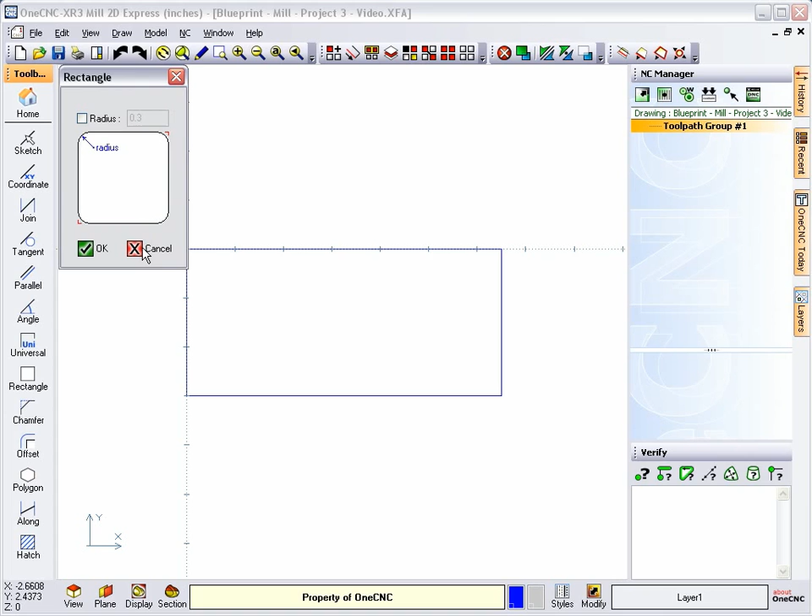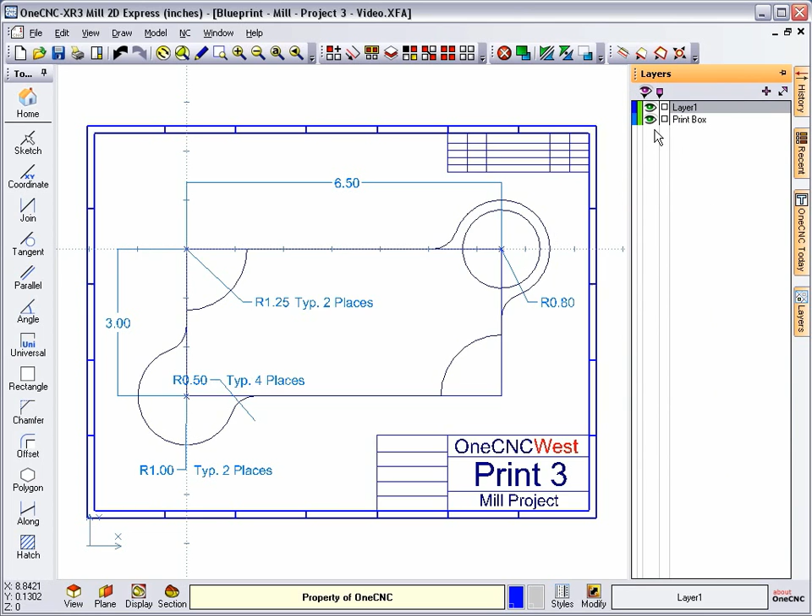The next thing we want to do is create the actual circles at the corners. Why don't we create these 2 circles first? Now if I open up our blueprint, I believe those have a radius of 1 inch. If we look down here we can see radius 1 inch, typical 2 places, so that's these 2 right here. So let's turn our blueprint layer off. We're going to head home, select arc, choose the very first command, and the radius is going to be 1 inch. We'll click OK to that.

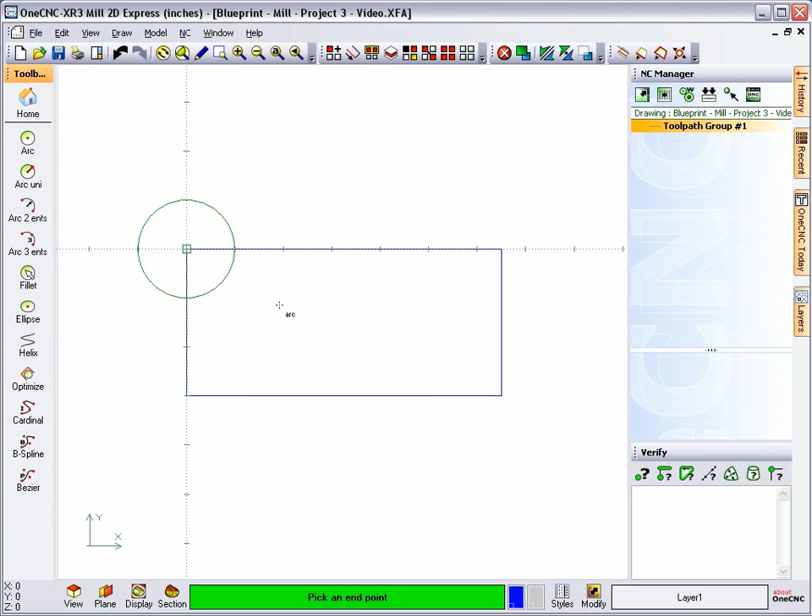And now I want to place these circles at these endpoints. We could use coordinates, but why type in coordinates when we already have geometry that we can use? So let's use endpoint, and all you do is just take your cursor and snap where you want to create that arc. So I'm going to left click, I'm going to left click. Now I'm finished with this command, so I'm going to right click the mouse. You could also hit the escape key on the keyboard if you want.

Now there's another arc in here that has a radius of 0.8, so let's create that. We're going to select the arc tool. Let's change this radius to 0.8. We'll click OK to that. And now we have several options. We could use coordinate, we could use endpoint, or we could use arc center because there's already an arc there. I'm going to use arc center. I'm going to left click. I'm finished, so I'm going to right click.

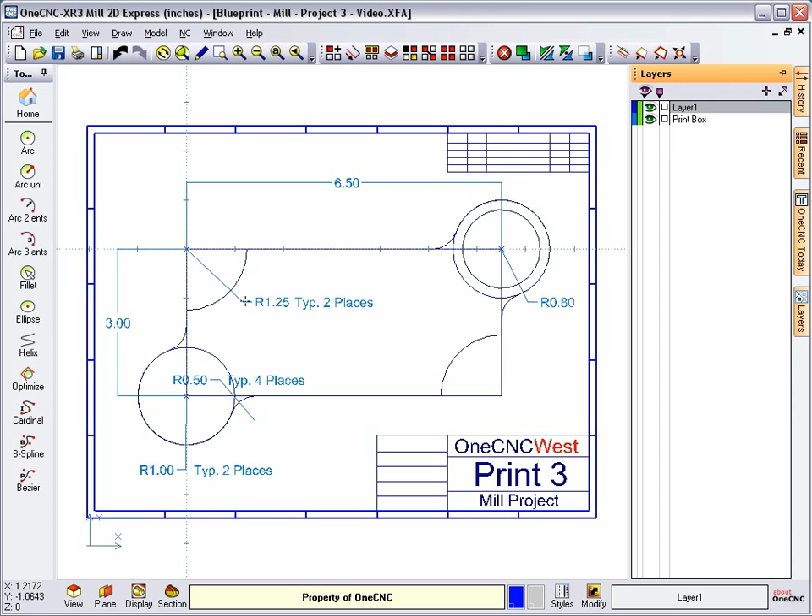Now we need to create these 2 arcs, and I believe they have a radius of 1.25, but let's double check that. And sure enough, those both have radius of 1.25, so we're going to turn our blueprint layer off. Going to head here to arc, and the radius is going to be 1.25. We'll click OK, and I'm going to use endpoint again. So I'm going to left click and left click. Now I'm finished with the command, so I'm going to right click. So you can see now we very quickly have created our basic shapes. We have our rectangle in place, and we have all of our circles created as well.

Alright, let's start trimming our part now. But before we do this, I want to remind you that all circles are created counterclockwise, and all circles start and terminate at 3 o'clock. If you remember this, it will certainly assist you when you start trimming. Alright, let's begin. I'm going to click home and then trim. Let's go with trim 2.

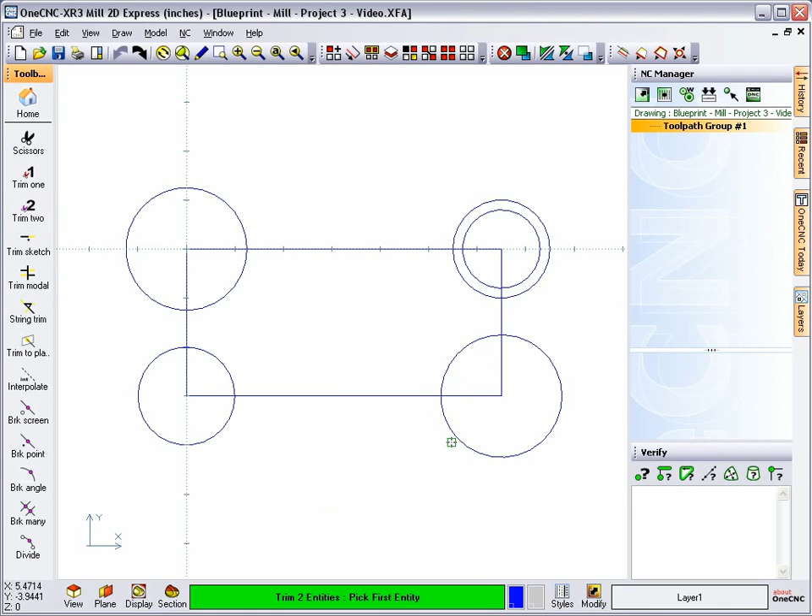And we're going to work with this circle in the lower right hand corner. I want to keep this portion of this line and this portion of the arc. Now notice how the arc terminates at 3 o'clock. That's because the arc started at 3 o'clock and went counterclockwise until it stopped. And we told OneCNC to keep this portion of the arc.

So let's continue trimming. We're going to left click here and then left click right there. That looks great. Now let's work here in the upper left hand corner. I want to keep this portion of the line and this portion of the arc. Now when I do that, you might say, wait a second, it looks like OneCNC trimmed both at the same time. In actuality, that's not the case. OneCNC trimmed down here, but the remainder of the arc stops at 3 o'clock, and that's why we have this.

So let's continue trimming. I'm going to left click here and left click right there. And that looks great. Let's continue working with these 2 circles now. Alright, so what we're going to do is tell OneCNC we want to keep this portion of the horizontal line. Now what's interesting here is if I digitize this circle over here on the left, it's going to take this line and extend it all the way to the left, and I don't want that. And this is really something that you want to keep in mind when you're trimming. Let me give you an example.

I'm going to digitize a circle over here, and sure enough, OneCNC does exactly what we told it to do. All right. Now I don't want that, so to get rid of this, I'm just going to right click to exit out of the command and hit the undo button. I'm going to go back into trim. This time I'm going to say, okay, I want to digitize here, and I'm going to digitize the right side of the circle. So now I've got to trim from here to here.

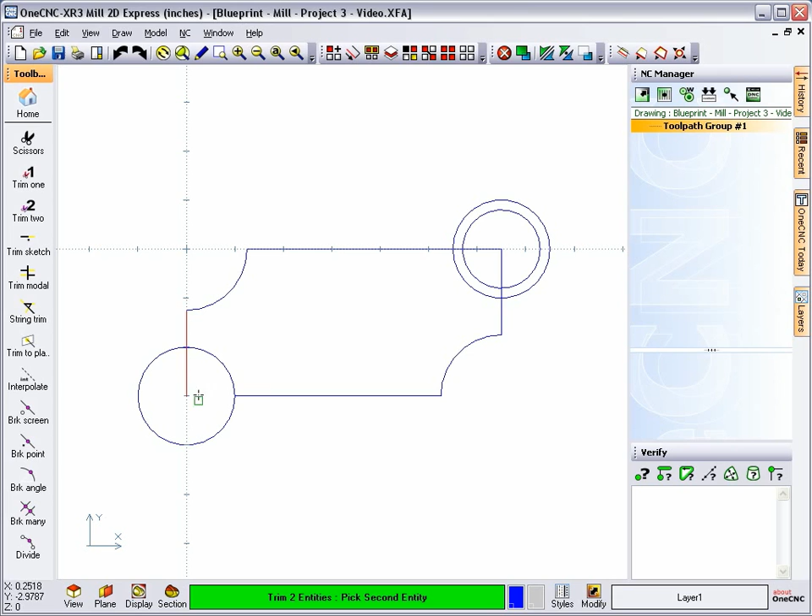Now let's trim up here. I want to keep this portion of the line. I don't want to trim the circle down here. I want to digitize the circle up here. And I want to keep the outside. I don't want to keep the inside. I want to keep the outside. That's why we end up with that.

Alright, now let's trim over here. I want to keep this portion of the horizontal line, and I want to keep the left side of this circle. I don't want to digitize the right side, or it will take this line and extend it all the way to the right. So I'm going to left click there.

Now what we want to do is take this circle and trim it to this line. Now remember, we need to digitize what we want to keep. I'm going to digitize the circle, and I don't want to digitize the line up here. I want to digitize it down low because I want to digitize what I want to keep. I don't want to keep anything up here, so I'm going to be really safe and just digitize down here. And you can see now that it's pulled the circle all the way around.

Alright, now let's put our fillets. So let's hit the home button. We're going to go to Arc, and we're going to select Fillet. And now you don't have to do this, but I think this is just a habit for me, and that might be my experience with other CAM systems. But I always like to digitize my geometry counterclockwise when working with fillets. A lot of times it doesn't matter, but for safety, why not just adhere to that?

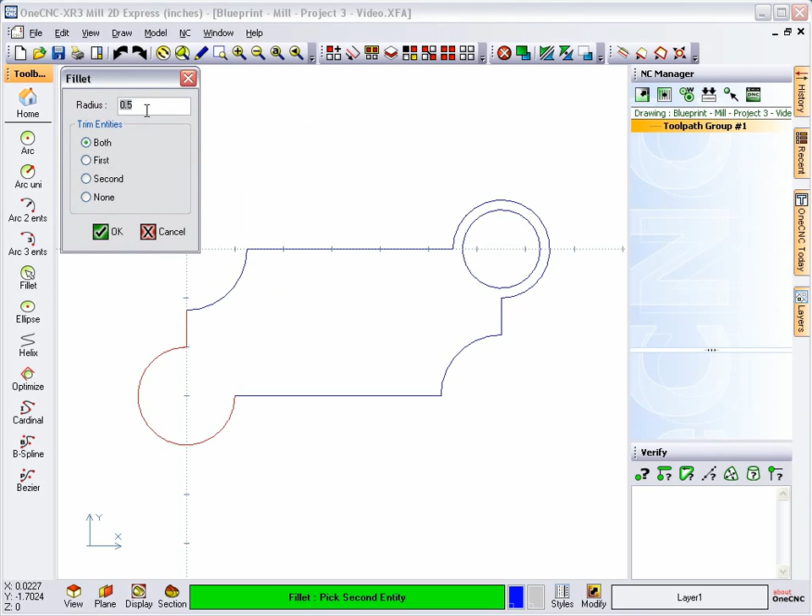Okay? So for my fillet, I'm going to digitize here and here. So I've digitized in a counterclockwise fashion. It's not necessarily something that you always have to do, but it's a nice, safe way to approach fillets. So I've got a 1/2 inch radius there. We'll click OK, and there's the fillet.

Same thing here. I'm going to digitize here and here. You can see that's counterclockwise. And we'll click OK to that. Here and here. That's counterclockwise. Here and here. That's also counterclockwise. We'll click OK to that.

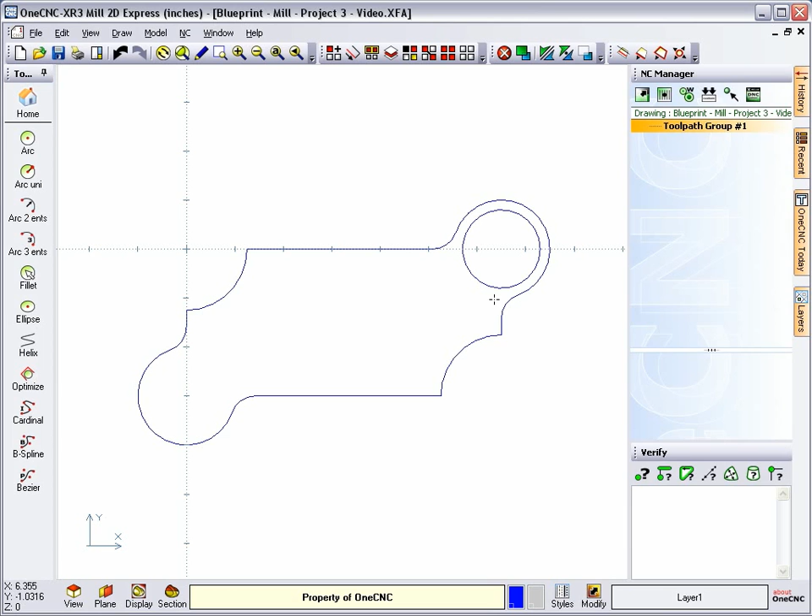So there's our fillets. I'm going to terminate the command by right-clicking, and let's bring our blueprint up to see how our part looks against our geometry. And we can see that it looks like we did a pretty good job there.

Alright, so the whole thrust behind this particular exercise was to learn how to trim circles and to realize that circles always are created counterclockwise and start and end at 3 o'clock.